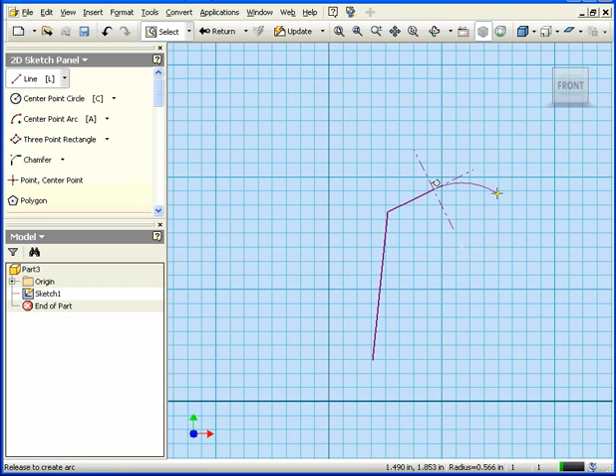Welcome to our tutorial about using constraints. First, let's create a sketch. Something like this. And let's close it off like this. Right-click and done. Now let's apply some constraints.

Let's begin with a tangency. This side already has tangency. If I try to apply it a second time, I'll get a warning message. Let's cancel out.

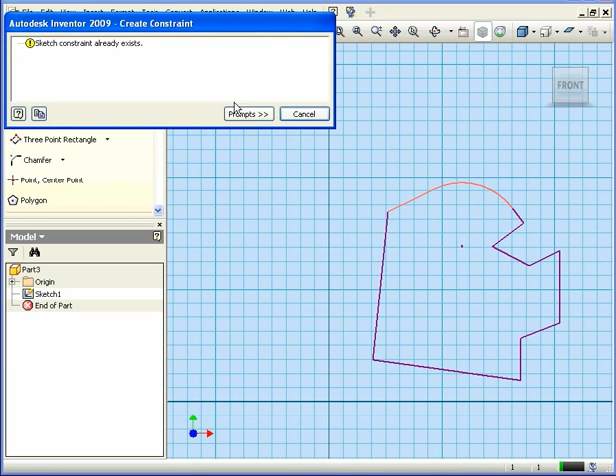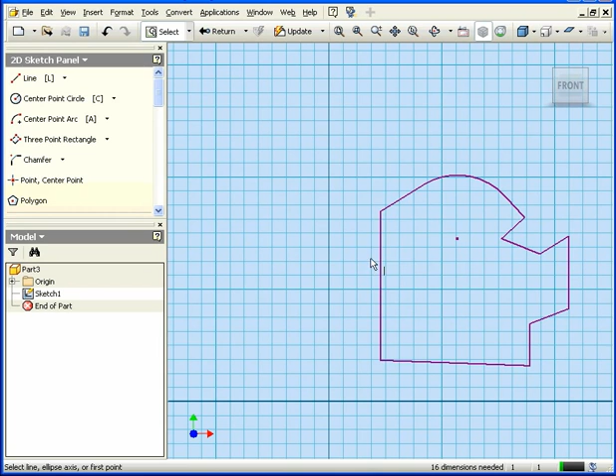Next, let's use the vertical constraint. Let's apply it here. When I try to apply it here, again I get a warning message. The reason for this is that these two lines are parallel to each other. Let's check it out. Right-click, select Done.

Now right-click again and select Show All Constraints. As you see, these two lines are parallel to each other, and this line has a vertical constraint. Let's hide all the constraints. Right-click, Hide Constraints. Now let's continue and apply a few more constraints.

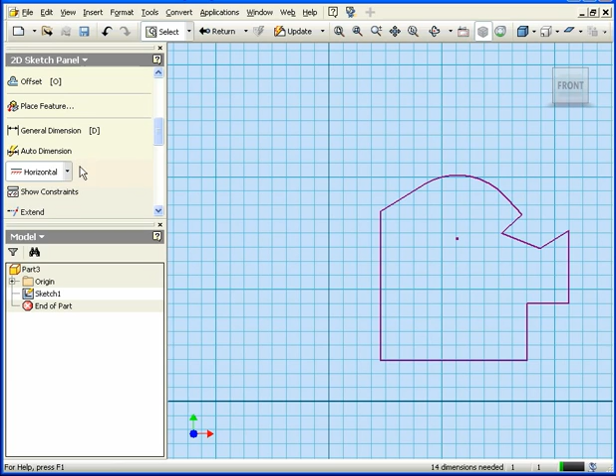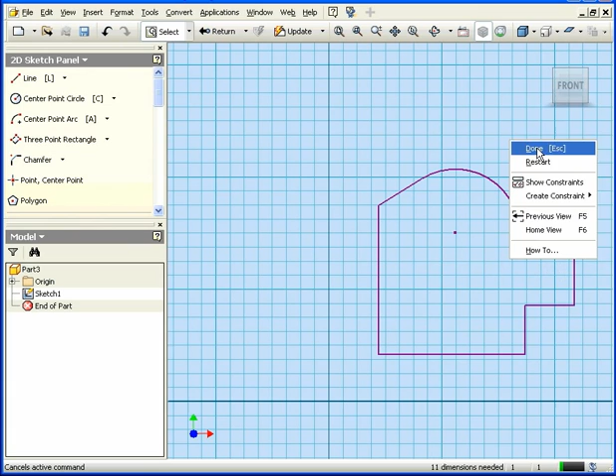We're going to use a horizontal constraint here and a horizontal constraint here. Next, let's apply an equal constraint. We'll make these two lines equal. Let's use a perpendicular constraint between these two lines. And between these two lines. Right-click, Done. I can simply grab and drag this line here.

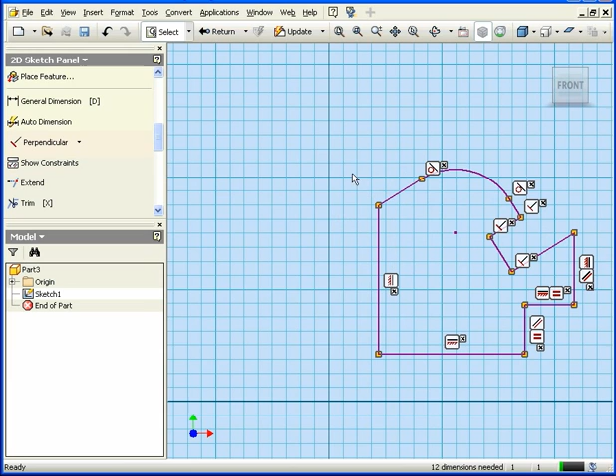If we want to see constraints on a specific segment, simply click Show Constraints. And if I, for example, select this line or do a drag selection, once again, if we want to see all constraints, right-click and Show All Constraints. Now, if I want to delete all the constraints, I right-click and select Delete Constraints. Okay, let's right-click and hide all of these constraints.

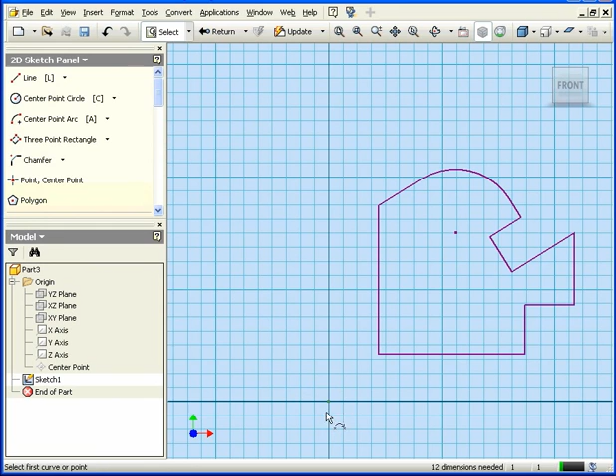And lastly here, I'm going to anchor my sketch to the origin point. I'll use the Project Geometry tool and then select the center point. Now we see the center point appears right here. Let's apply a coincident relationship. Select this point and this point. Right-click and Done. Of course, so the sketch becomes more stable, we do need to dimension it here.

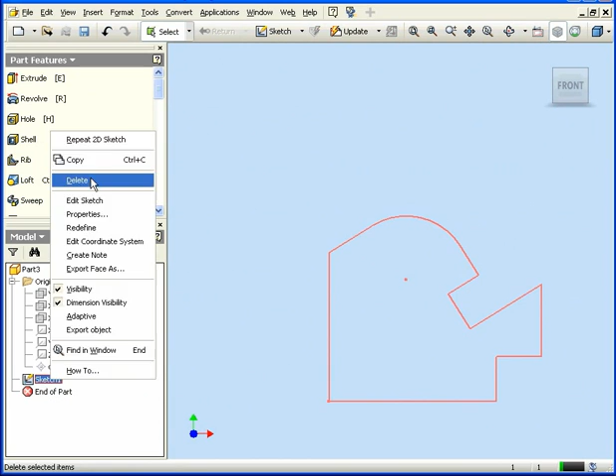Let's exit this sketch, return. Now right-click and delete the sketch. Okay, select Tools from the main menu, Application Options. Here, let's check the box Auto Project Part Origin on Sketch Create. Apply and close.

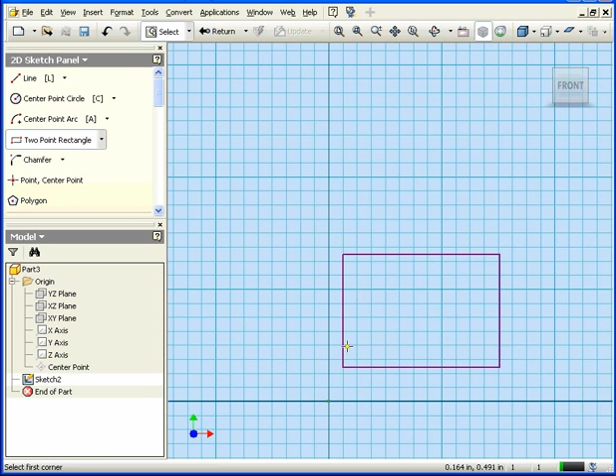If I create a new sketch now on, let's say, the XY plane, you'll see that we already have a point created here. Let's create a two-point rectangle. Scroll down. Select Coincident, and again I'll select this point and this point. And this concludes our tutorial on using constraints.